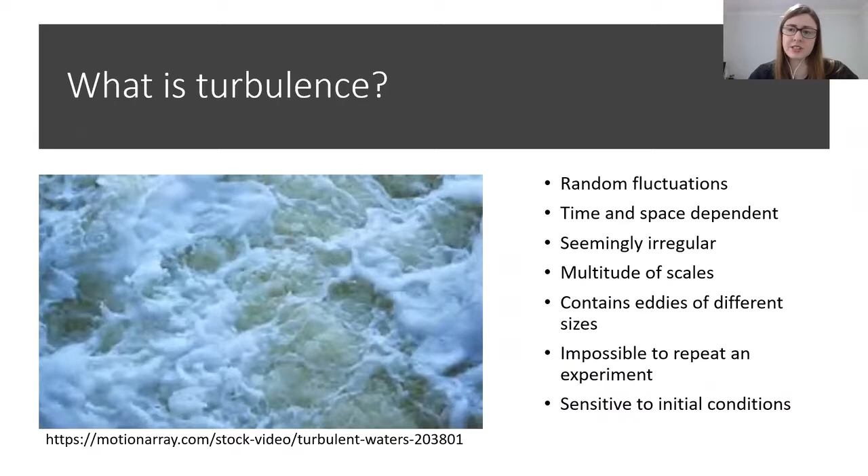Many researchers consider turbulence as an unsolved problem. This is a topic of some debate. However, I must be honest, I'm definitely on the side of it being unsolved. And some of the reasons are because the characteristics of turbulent flows have really been discovered through experiments and not so much the theory. So as someone from a very theoretical background, who has very little experience with experimental results, it is very interesting to note that all these observations have come from there. And therefore, it is so important to incorporate different areas and fields of research in order to understand this problem.

We are certain about the equations to some extent, the Navier-Stokes, but what's not so certain is how to actually go about solving them. Now, you could say that because computational approaches are getting better almost on a daily basis, they can be used to solve the equations. However, I would argue that computational approaches are not a substitute for understanding. So in this talk, I'm going to be looking at simpler models, and we're going to try to discern characteristics of models that do lead to good comparison with data. So that's what we will be looking at.

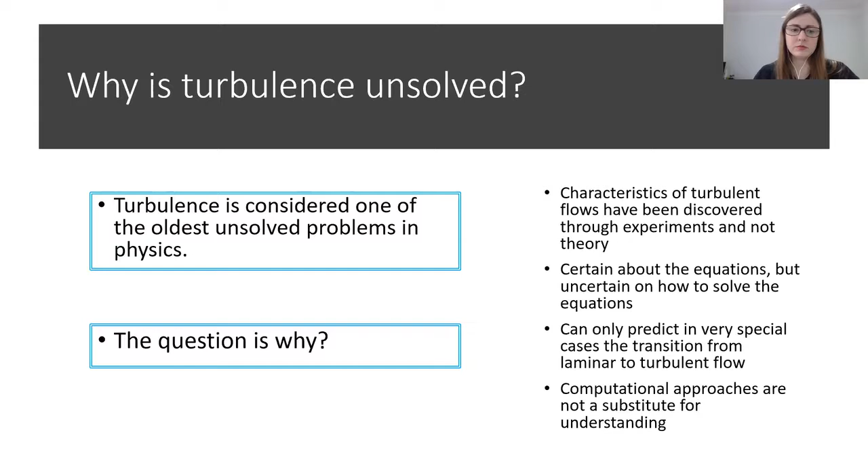So as we know, there are many different approaches to modeling turbulence, and a lot of these approaches were developed by the researchers shown on the previous slide. They can be grouped into different categories. We've got simulations that really involve computational methods, and then we've got turbulence models. We will see that later we need some quite hectic numerical tools to solve some of these turbulence models, but in essence, they are technically computationally less expensive.

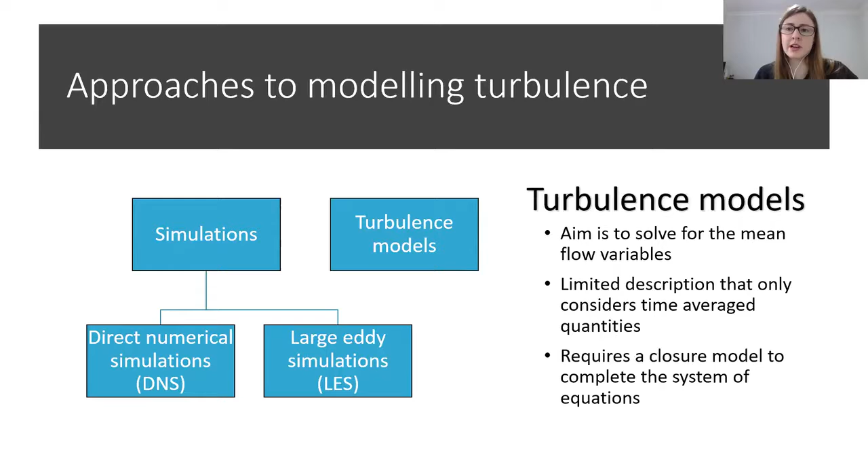So the goal of this talk is going to be to look at different closure models, and then I'll actually show you how they compare with experimental data. We will then go on to discuss which models were successful and also why they were successful, as it might also help down the line when developing new closure models.

We start simple. We're going to look at eddy viscosity closure models. And basically in these models, we take the flow, we divide it up into a mean motion and an eddying motion. So here we've got u_i, which is the ith component of the velocity, is just equal to its mean plus the fluctuation. So we substitute these variables into the Navier-Stokes and then we average over them. We'll be looking at statistically stationary turbulent flows, which means that the average of the fluctuations is 0, provided that our time interval that we are averaging over is sufficiently large.

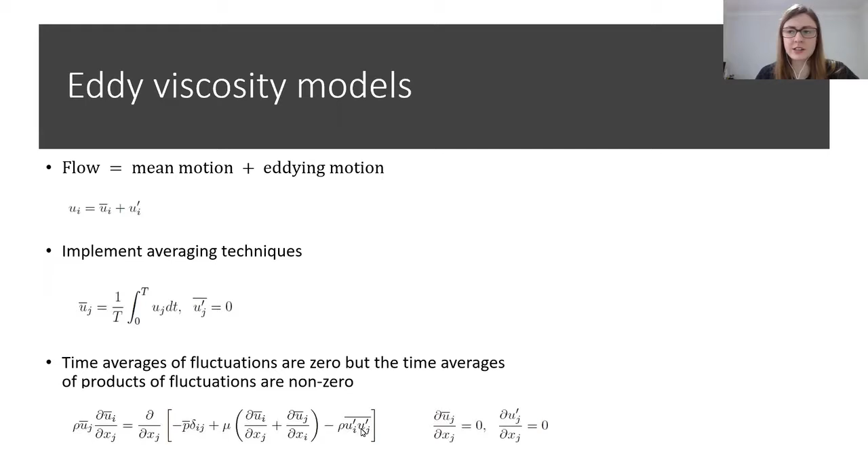When we do this process, we get a whole lot of terms disappearing, but the averages of products of the fluctuations are non-zero. So what happens is that we get these additional terms coming up in our equation, and these are not known. This is why we need a closure model to complete the system. So I've written the RANS equations in this form over here, just so that we can identify the different stresses and then also look at the closure models for the turbulent stresses.

So we see the three types of stresses. We've got the isotropic, which arises from the pressure, the viscous stresses, which are there for all fluids that have viscosity, and we've also got the turbulent stresses. With these eddy viscosity closure models, one way to look at this is to take these turbulent stresses, sorry, I keep losing my cursor, to take these turbulent stresses and to express them in the same way as the viscous stresses. But instead of being related by the constant dynamic viscosity mu, we introduce a turbulence viscosity mu_t.

Unlike the mu, which is a constant, this mu_t can depend on space and velocities, gradients, and a whole lot of things. So we'll be looking at different forms for that, and then we'll be comparing it later. So this is basically what eddy viscosity models do, and they're quite simple in the sense that turbulence is really modeled as an apparent increase in the viscosity of the fluid.

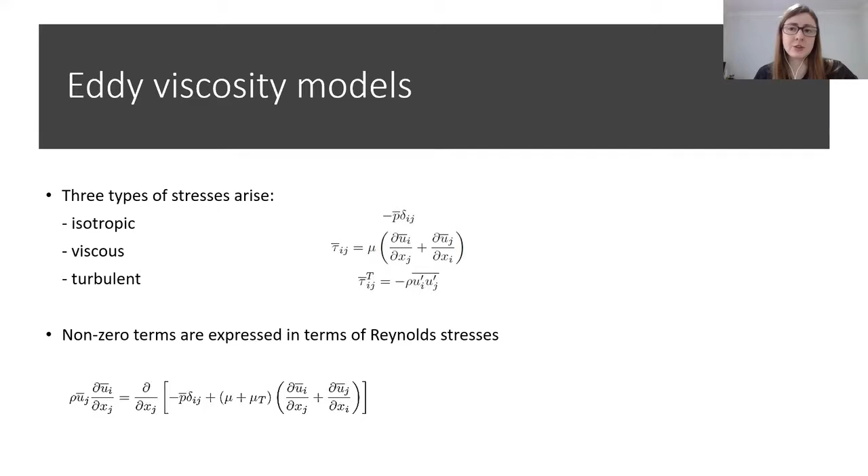It's always convenient just to separate the flow into what we know about laminar flows and how turbulent flows change the structure. So we define an effective viscosity, which is just simply the sum of the kinematic and the turbulent viscosity. So for laminar flows, this term would not be present. So we can just always compare back just by knowing that.

What's really great about eddy viscosity closure models is that they provide a simple description of turbulence, which seems to be pretty intuitive. They're relatively easy to implement. I will argue that point later, as the one model gave us many sleepless nights and migraines. They often agree well with experimental results, which is perhaps somewhat surprising. And in some cases, exact solutions can be found. Exact solutions are fantastic because they are free from numerical error, but they also provide a baseline to compare other models to, and it also helps to develop some numerical schemes.

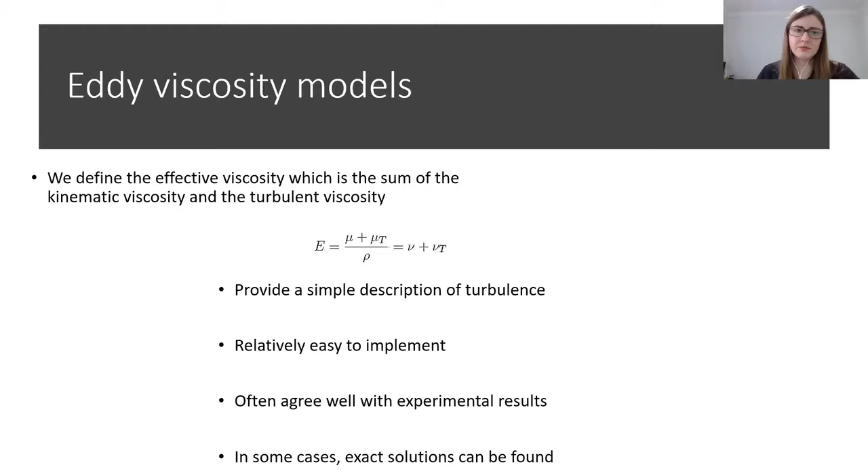And basically the goal is to optimize the generation of energy. Turbines that are situated in wakes of turbines in front of them have decreased power production. So wake steering controls are very important, and a good understanding of these turbulent wakes is required so that you can actually effectively run these wind farms.

Now, this is clean energy and renewable, which is great, but on the other hand, there are certain bird species, such as the bearded vulture, that actually use the lift from the wind turbines, and often they end up hitting the turbine behind it. So of course, with everything, there are massive positives, but there are often downsides as well. So understanding turbulent wakes for nature and for humanity is actually very important.

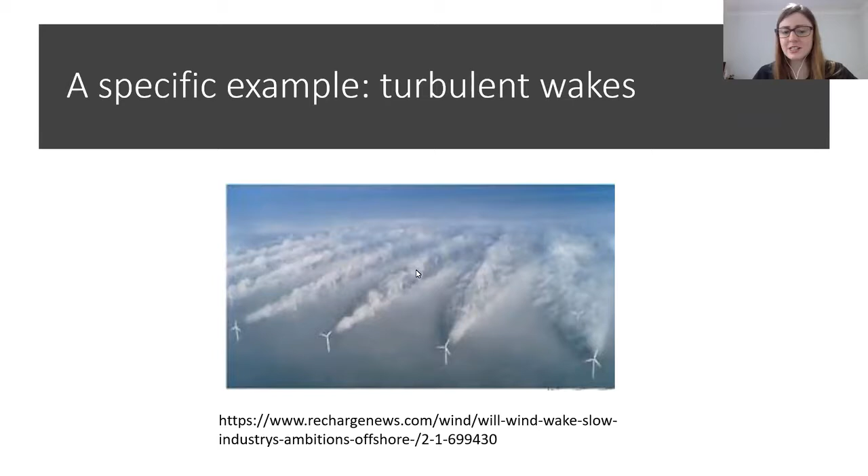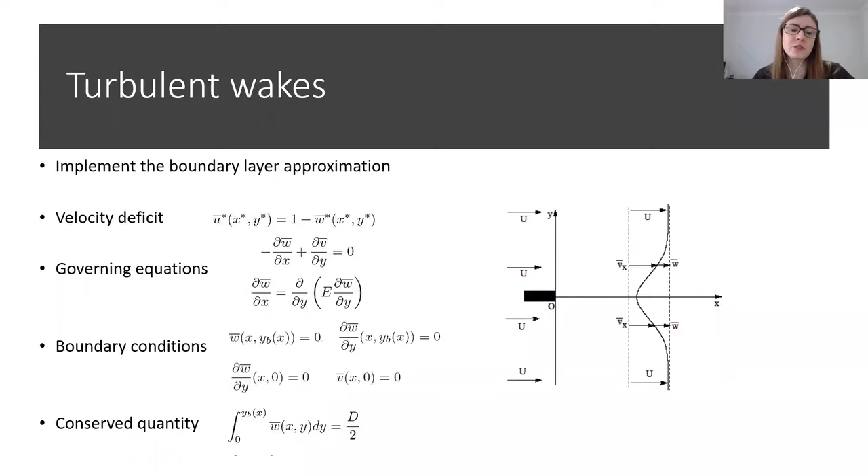Okay, so I guess now for the quite exciting bit, because it's not the oldest work either, it's still fresh, and we haven't quite gotten sick of it just yet. Maybe in a few more days that will happen.

We wanted to look at a whole suite of models and compare them to experimental data, and none of us have any experience with this, but luckily there is this really amazing paper where they have conducted very detailed experiments. Unfortunately, the data has actually been lost as the ages have gone by. We contacted the corresponding author, who gave us permission to reproduce the results as much as we could.

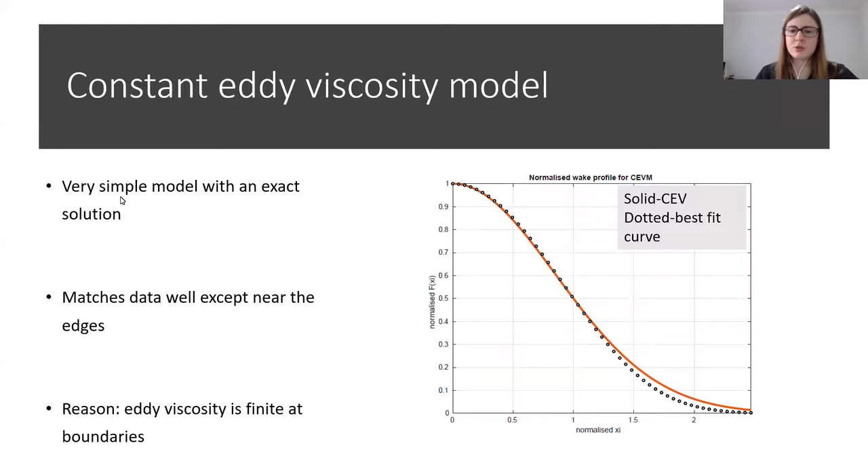All right, so let's move on to some slightly more complicated models. I'm not sure if everyone is familiar with Prandtl's mixing length model, but I must be honest, the derivation of this model has bugged me for about a year. So I'm going to present it here because we'll also need it later on when we look at another model that does not have a derivation currently in the literature, from what we can see.

Okay, so for Prandtl's mixing length model, the aim was basically to improve on the constant eddy viscosity model. We'll see later it's not so much of an improvement, in my opinion, but nevertheless, let's look at how it works. With Prandtl's mixing length model, the whole idea is based on the fact that turbulent particles coalesce, they form lumps. These lumps move as a whole, retaining their momentum until they mix in with the surrounding fluid. So that's really the whole picture that we're looking at.

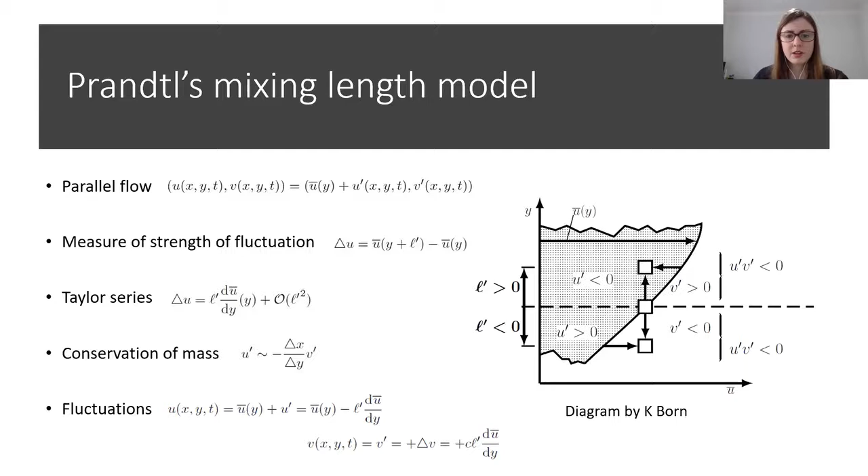So what we do is we take the expressions for u prime and v prime that we just found, and we substitute it into this equation here, and we get this expression. So you can see that the average of L prime squared is just really the variance. And we'll take c times that to be some other function L, which is referred to as the mixing length, from which this model derives its name. So with the eddy viscosity closure models for parallel flows, we only have the one derivative coming out.

So when we write the stresses in terms of our eddy viscosity model, we can compare these two expressions and just get the turbulent viscosity, which then is written in terms of the mixing length and the absolute value of this derivative. The absolute value is included because we might be looking at du bar by dy positive or negative. So that's just to take into account both of those cases.

Now, what's really nice about this model is that it can be easily transferred to apply to wakes. Because we're using the boundary layer approximation for our wake flows, all we need to do is just to replace this derivative with the partial of the velocity deficit, because in the stress terms, it's the same form basically for the wakes as for parallel flows. So finally, we get an effective viscosity that looks like this. This is just dimensionless. The first term corresponds to the dimensionless kinematic viscosity. The second is then the turbulent viscosity. So this is the second model that we look at.

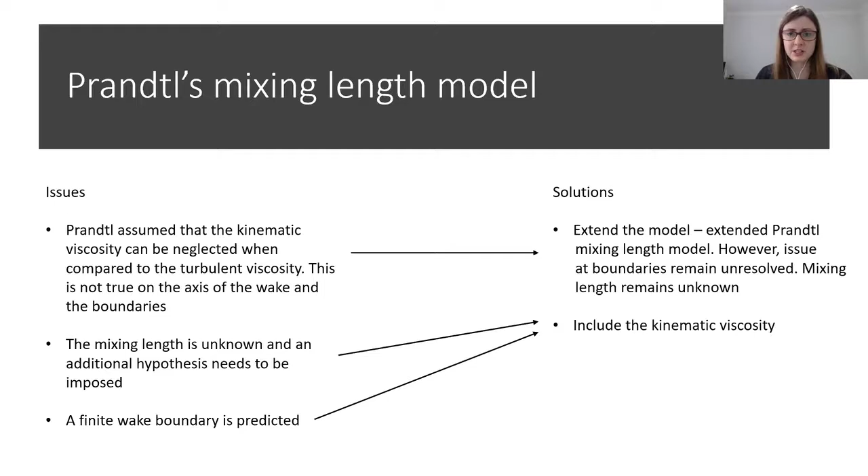Also, a huge problem is that the extended Prandtl model, although it does improve on many issues, introduces two mixing lengths now, and these mixing lengths remain unknown. The same issue is also found in Prandtl's mixing length model. You can't obtain the mixing length. You need to impose an additional hypothesis, which is what Prandtl did, and also a finite wake boundary is predicted. Both of these issues can be rectified by including the kinematic viscosity, which was work conducted during my PhD. So these are actually all resolved just from the very simple inclusion of the kinematic viscosity, which is quite amazing.

Now, unfortunately, with the extended mixing length model, there isn't a huge amount of literature on it. So I'll just explain a bit. There are papers that consider simplified versions of this mixing length model that also do have derivations, but the actual full-on extended mixing length model, as proposed by Prandtl, appears to be lacking a detailed derivation. And one of the things that we wanted to do was to rectify that. It was kind of just stated without any proof, and we know that Prandtl had fantastic insights.

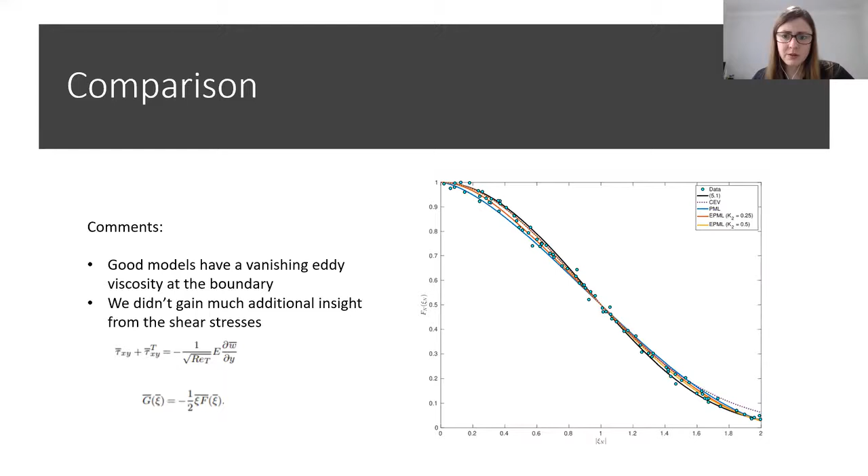Extracting the data comes with its own errors as well, so we just have to be careful. What we are confident about, though, is that the extended Prandtl model is definitely superior to the others. I did not include the table here, but we looked at an error analysis and at how well the extended Prandtl fits the data. Based on the data points that we were able to extract, it seemed to be about 20% better than all the other models, which is really significant.

I think it's a good starting point also to look at other models to see if we can do even better. So there are a couple of things to consider. We can consider new experiments. Quite looking forward to doing this; I think it will give really nice results. I'm hoping, but we'll see. So considering new experiments and re-looking at the extended Prandtl model derivation.

And also we realized that with the closure models that generally fit the data well, we have this property that the eddy viscosity vanishes on the wake boundary. But what happens is that the solution tends asymptotically to the solution for the laminar wake, which is an exponential solution. So there are a whole range of different closure models that actually satisfy all those properties.

But we don't want to just apply arbitrary functions. We want to back it up with the physics as well. So we want solid derivations and models to look at that all tie in with the physics. We won't just look at something random. So that's really what we're looking at in the next sections.